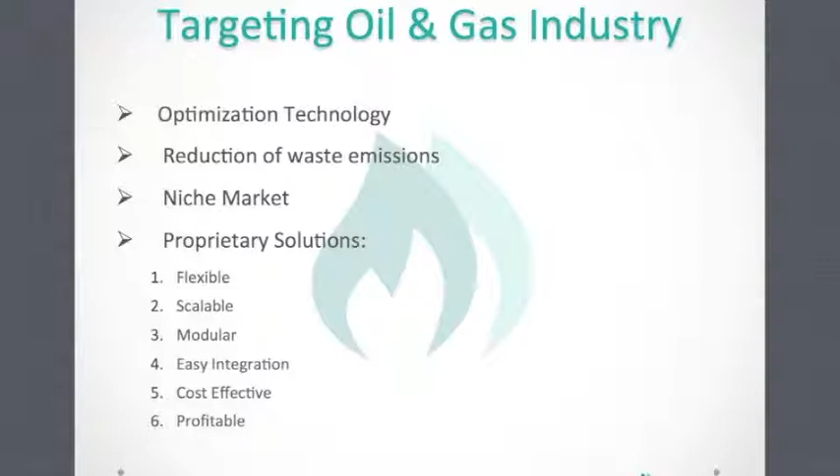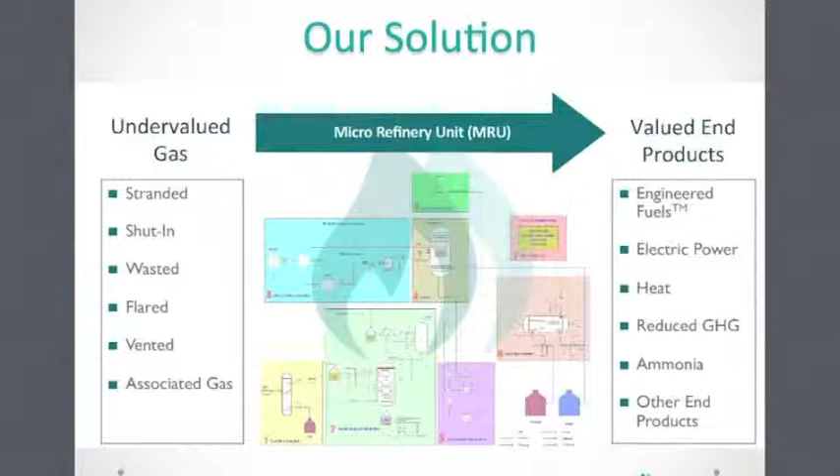Okay, effectively the Well Power solution is to find undervalued gas. And that's gas that's stranded, shut in, flared, wasted, vented, using our technology in the middle, which I'll explain further. And then we can create valued end products. So we've got engineered fuels, which we can tailor to the specific needs of the site. We can create electrical power, heat. We're reducing greenhouse gas emissions, so we get credits for that. We can make ammonia if we want, and then there's other end products depending on the specifics of the site. Okay, Rana, next slide, please.

Okay, the advantages of our micro-refinery unit compared to other people's technology is we are energy efficient. The reaction is actually exothermic. No energy has to be added in. We get a high yield. So we can create 32 to 38 API oil. We can create diesel. We can create invert mud base frac oil. Like I said, it just really depends on the needs of the individual site.

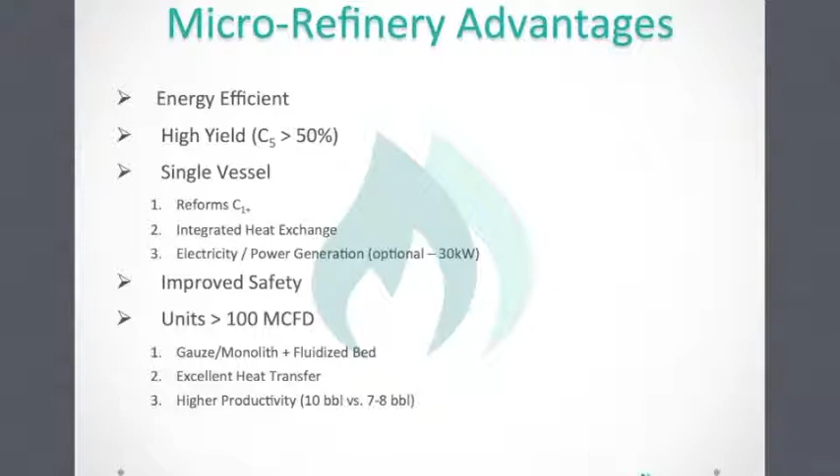It's a single vessel, which keeps the cost down and minimizes the amount of control and process we need to work with. It also helps with safety, and we can do units as small as 100 MCF a day and up to 500 MCF a day. If we need more than that, we'll use 2 or 3 units in parallel. So if we needed 1 million a day of capacity, we would put 2 units in parallel. Next slide, please, Rana.

Okay, I'm going to walk through the steps here, and then on the next slide I'll talk about how we can modify these boxes to fit the individual process. So box 1 is just an inlet separator. We need to take the free liquids out of the gas. So you've got a mixture of oil and gas coming in. Oil and water go into the tank and the gas goes through the process. Box 2 is preconditioning the gas. If there's a little bit of H2S in the gas, or if there's still some free water in there, we'll need to have an H2S scrubber or another desiccant dryer type unit.

Box 3 is compression. Now our unit operates at 30 bars and 900 Fahrenheit, so we need the compression here. One of those compressors is air, and one of those is the natural gas. And then we go into our box 4. Now our box 4 is the actual patented technology. All the other boxes on here are off-the-shelf, standardized oil patch things that anybody familiar with oil patch operations knows how to operate.

Box 4, that reactor vessel, is a 2-stage reactor. The first reaction is a POX reaction, and the second one is a Fischer-Tropsch. In between the 2 reactions, we need to drop the temperature, so we have a heat exchanger. That heat exchanger can be used to create electricity.

Okay, a lot of times people bring out new technology, and it is very, very rigid, and it only fits in very specific cases. Our technology, the way it's designed, we have our reaction vessel. That was the box 4 on the previous slide. Now, if we can go back there for a second, Rana. So we have the box 4. That is what our patents are around.

If you have a site that already has an inlet separator and already has storage tanks, we don't need to bring those out. If you have a site that already has compression, we don't need to bring those out. Now this is very important because this means we can modify the vessel or the process skid to match the individual site's needs.

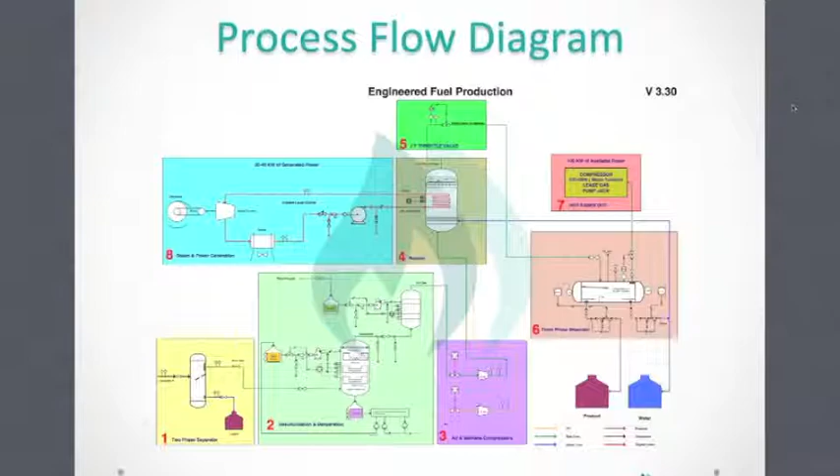Now this also drives how the economics work because we can change the business alliance based on what kind of skid we're providing. Okay, thank you. Next, go forward there, Rana.

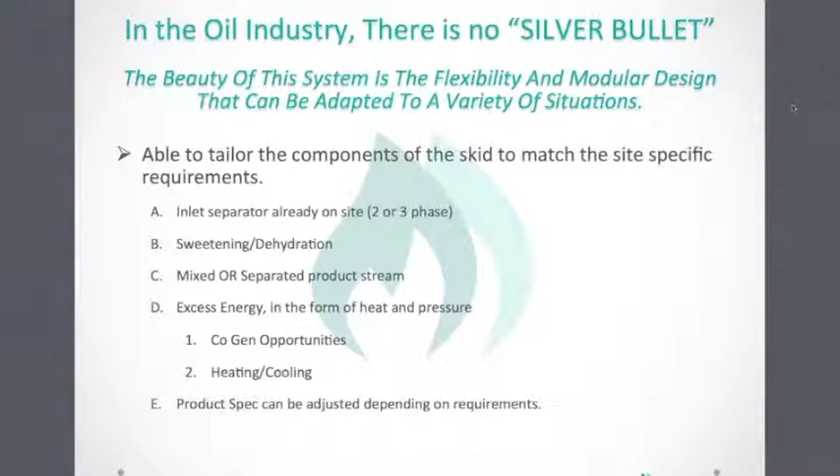Okay, so basically we can modify our reaction to change the end products depending on the need. If you're in a remote location and need diesel, we can make you diesel. If you need frac oil, we can make you frac oil. If you just want to sell high API crude straight down the pipeline, we can create that as well. It really depends on the situation.

Okay, next slide. Now there's two ways to view the economics of this unit. One is an alternative to flaring when producing oil wells, and the other one is selling liquid hydrocarbons versus natural gas. So let's look at the first way, alternative to flaring. That's the next slide.

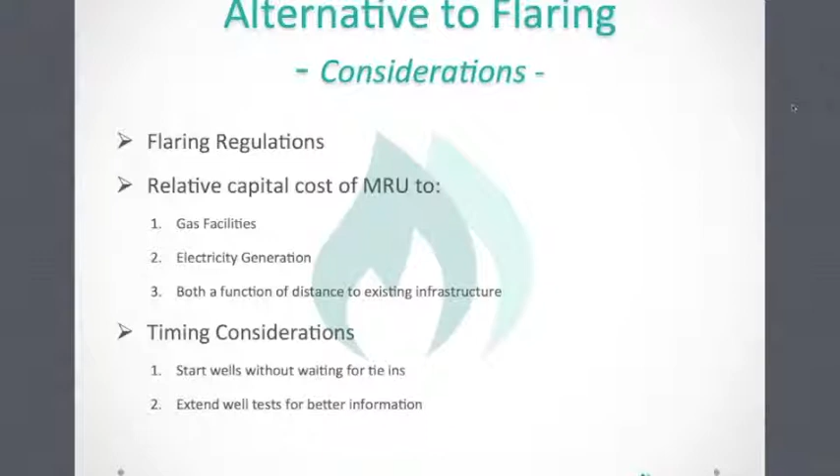Okay, so the alternative to flaring, the considerations revolve around flaring regulations, relative capital cost of MRU to gas facilities, electrical generation, and both of those are a function of existing infrastructure, and timing considerations. With Texas saying you can only flare your wells for 10 days, you have to leave your well shut in until you have the opportunity to bring pipe there. So now I've got a sample of the economics on the next page. Please move forward there, Rana.

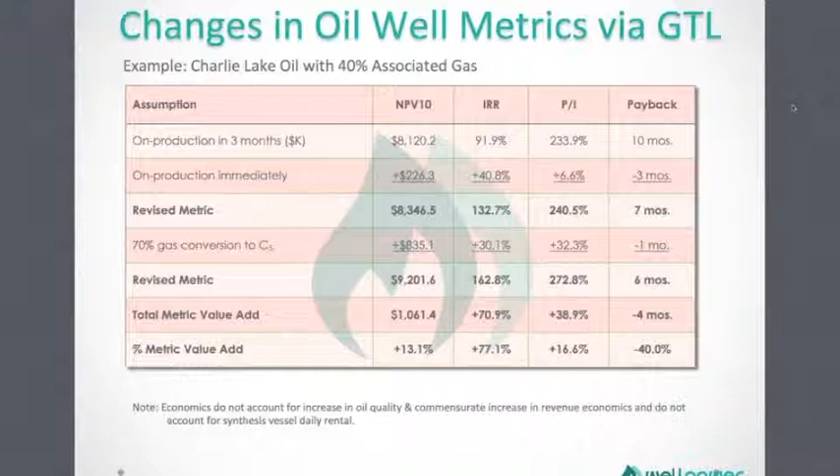Now, the only way you can bring it on immediately is either to put the pipe in the ground before you know what you have, or to take one of our units out there and rent it for 3 months, and so that is an opportunity to bring your wells on quicker. Next slide, please.

Now, that is just the revenue side, and you have to consider capital costs and operating costs. But that's where our flexibility in our skid design and our mobility really come into play, that we can change and modify not only the skid, the products, but also the business arrangement. Okay, next slide, please.

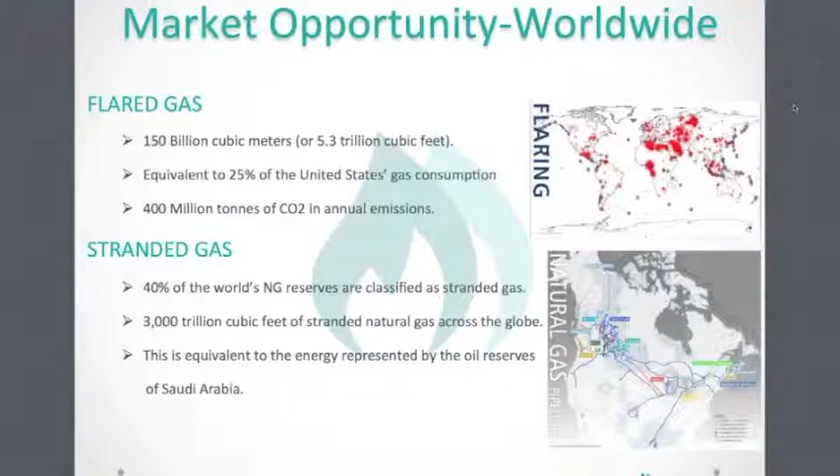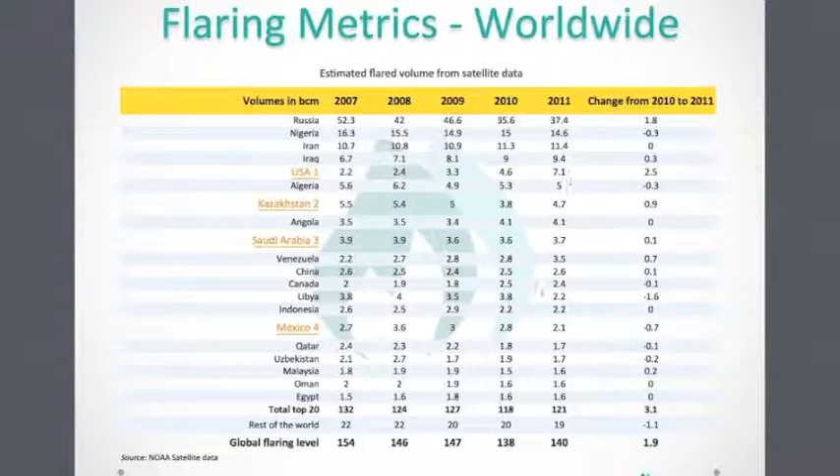So market opportunity worldwide, it's huge. There's all sorts of stranded gas that's being flared. You can read it and look this up for yourself. It's the World Bank website. Next page, please. And here is some of that information monetized. You can see the USA is 7.1, as I've already said, and you can look at the global flaring level as 140 at the very bottom there. Okay, next slide, please.